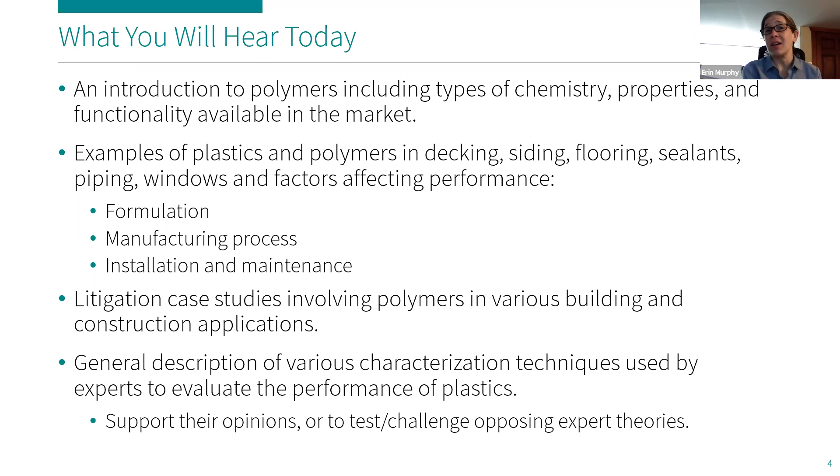So what are you going to hear today? We're hoping to tell you about what polymers are, give you a high-level Polymer 101 crash course. Once you understand the chemistry and properties of polymers, we'll tell you why they're useful in building and construction—applications in piping, windows, flooring—and factors affecting their performance, like formulation, installation, and manufacturing. Then some litigation case studies about how these polymers failed in these applications and why: is it formulation issues or installation? And the characterization techniques we use to form our opinions and evaluate the performance and failure mode of these materials.

But why do we care? We care because polymers are everywhere. If you look around, there are polymers in almost every application space and every industry, ranging from biomedical to aerospace, and of course construction—they're everywhere.

These polymers can come in many forms. You can get bulk polymers, like plastic piping to transport water. You can get composites, such as fiber reinforced epoxy. You can get films, like packaging materials. You can get paints and coatings that go on tanks. You can get adhesives and sealants that need barrier properties. All of these are polymers in some form or another.

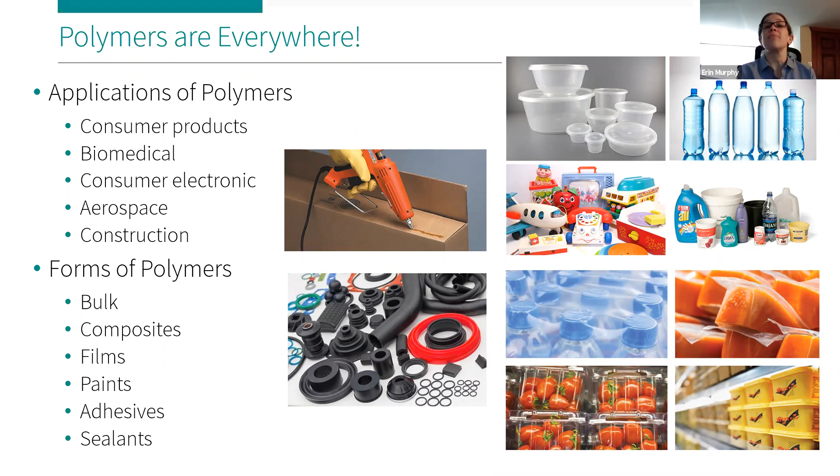In the grand scheme of things, products are always designed to work perfectly. We think about the end use conditions when we design the polymer and the formulation, how long it needs to last in the application. We validate it, test it, pull on it and push on it the way we think it'll be stressed. And we look at all the quality control we need in the manufacturing process to ensure we've met the performance spec.

But there's a lot of factors outside our control. Something goes wrong in manufacturing, or somebody value engineers a component out of the system. There's a lot of places in the supply chain where communication can break down. Somebody can install it wrong, or didn't consider an environmental factor when they spec'd that product in. So even though we designed everything to work perfectly, sometimes things can still fail.

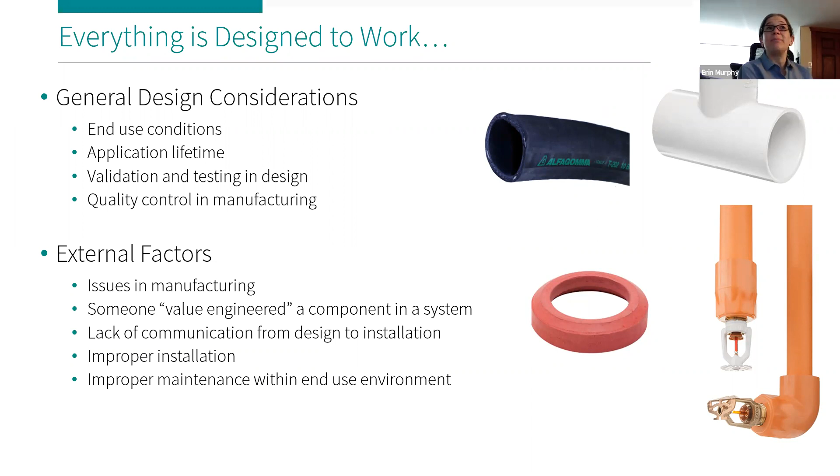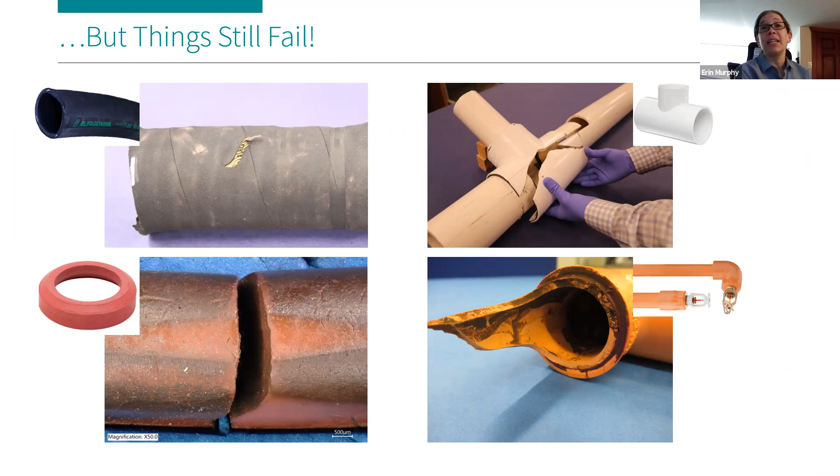And that's what we end up seeing. These products are designed perfectly, but something goes wrong, whether that's manufacturing, overloading the system, improper design, or some combination thereof. And that's where we get called in, and that's where we end up having a lot of fun.

So today we're going to split this talk up into a few sections. I'm going to start with that high level Polymer 101 - I promise not to make it too painful, there will not be a test - and tell you about the tools in our polymer chemistry toolbox that give you the properties and function you need in application. Then I'll hand it over to Mike, who'll tell you about common failure modes and case studies: plasticizer migration and environmental degradation in some sealant materials. Then Matt will finish us off with applications in concrete, flooring, and tile - application spaces where you just need a little bit of polymer, but if you mess that up it can have catastrophic effects.

So let's start out with Polymer 101.

So starting off with, what is a polymer? A polymer starts out with a monomer, which is just a single unit of something. When you link all of those monomers together, you build up what's called a polymer. Link one monomer with another, you get a dimer. Put 3 together, it's called a trimer, and you can keep building. If you have less than 10 units together, we call that an oligomer - just a small in-between material. But once you get past 10 repeat units, we call that a polymer, and that can go from around 10,000 molecular weight up to over 1 million molecular weight. So these can be very large molecules.

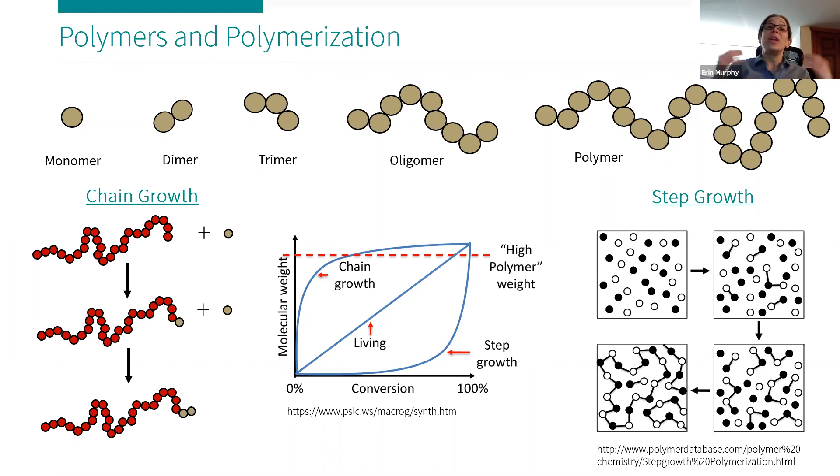Also, the type of chemistry is very important. There's a whole lot of different individual monomer building blocks we can choose to build our polymers out of - we've got a few up here on top. So ethylene is a monomer, tetrafluoroethylene is a monomer, and so on. By changing the chemistry of that monomer unit, we put different functionality into the polymer backbone. So as we polymerize ethylene monomer, we get polyethylene. From the tetrafluoroethylene monomer, we polymerize that to polytetrafluoroethylene, or PTFE, and so on. As we control the chemistry in the backbone, that imparts different functionality.

So for that fluorine group, that makes it very hydrophobic. It no longer will attract water, water will be repelled. And so that gives us the functionality that we apply to nonstick coatings or nonstick surfaces. Same for silicone. Silicone ends up being very high temperature, high chemical resistance. It's also very soft and flexible, so it ends up being used in a lot of biomedical applications. Lactic acid is unstable in water, so it can be degraded in the presence of water. By knowing the different chemistry and what it imparts, we can choose the different types of polymers and plastics for the application.

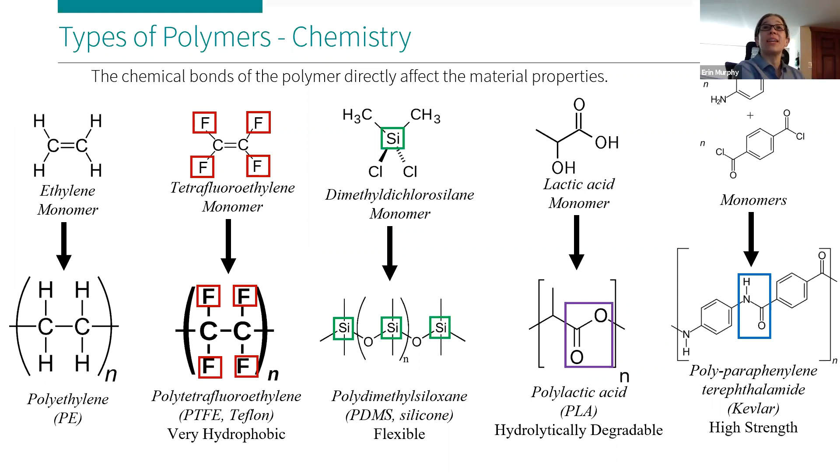There is a lot on this slide, but this is considered your cheat sheet to polymers. We break them up into multiple classes, so you can look at real world applications, like when you see your recycling logo on the bottom of your plastics and you get a number, 1, 2, 3, 4, 5. That breaks it up into these categories. You may see things like PET or PS or PC, those are abbreviations for what those polymers are.

So the different classes: we can have thermoplastic polymers. Those are typically recyclable, the ones that have the recycling logo, meaning you can melt them and reprocess them multiple times. Versus a thermoset, this is something where you have chemical crosslinks forming into a three-dimensional network. Those crosslinks can't be reversed, so it's a non-recyclable system, but that also tends to mean it's a very strong, stiff, high thermal stability material. So this is your epoxies and your phenolic resins.

You can also have rubbers or elastomers. These are your very stretchy, flexible materials, tending to be used in gaskets, sealants, things like that. And then you can have something with properties of both, which is a thermoplastic elastomer. It's temperature dependent, it can be plastic under certain conditions and elastomeric under certain conditions. As you can see, we can change the chemistry and get this huge wide property set, from plastics to rubber and somewhere in between.

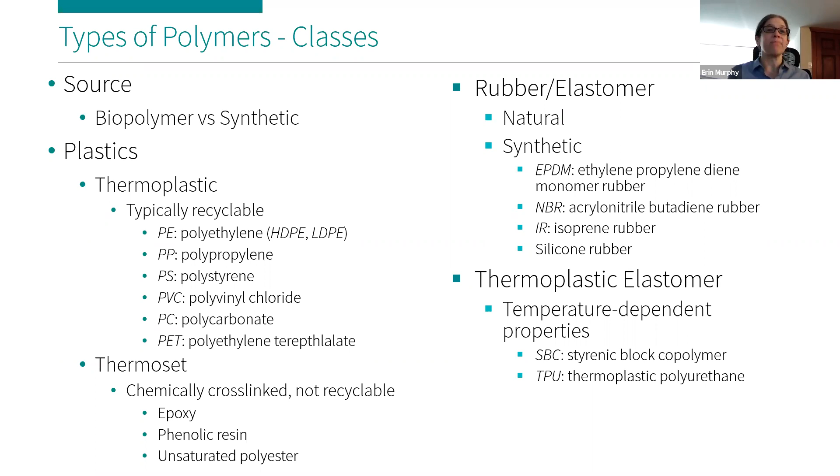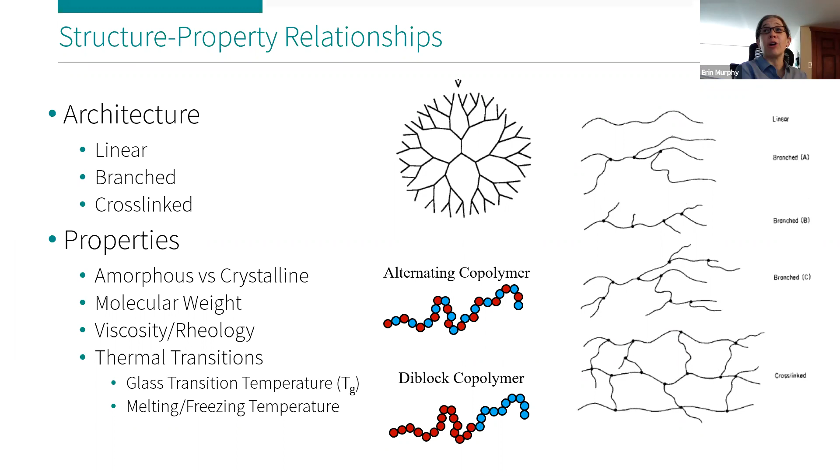Another way of getting that is by how we control those monomers. You can use multiple types of monomers, and if you put them in sequence, either alternating like we're showing here, red, blue, or in blocks, you'll get different performance properties. So by controlling how we place those monomers in sequence and the overall architecture, we can control properties.

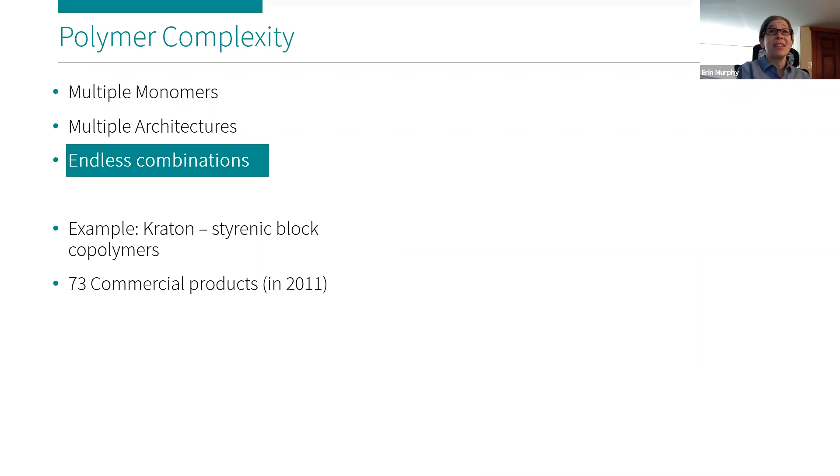So one good example, this is from my former company. You can have just a few monomers and a few different architectures, and you can get a lot of different combinations of polymers and commercial products. Kraton was my former company, we made styrenic block copolymers. In 2011, we had 73 commercial products. These all started from 3 monomer building blocks. So those are the 3 monomers.

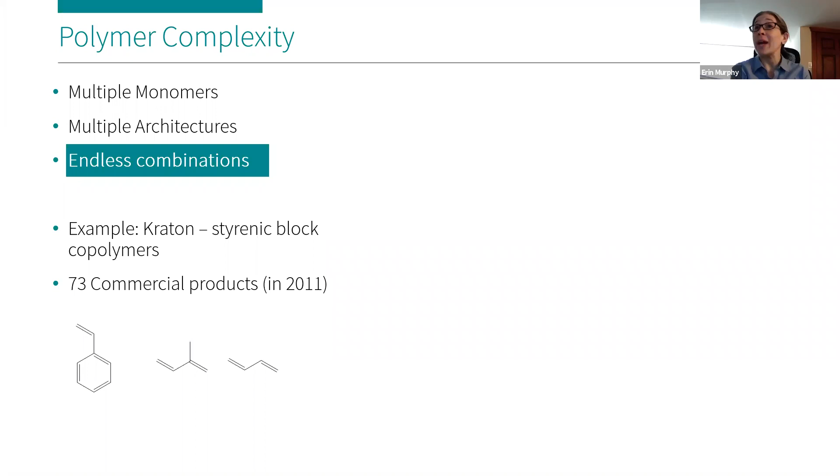Just 3 starting building blocks, but by changing the molecular weight, the architecture, the length of these building blocks, the ratios of styrene to rubber, the degree of branching, we could get all of these different products that all had different properties and all went into different applications. It was something really amazing to me as a polymer chemist: you just have a simple set of building blocks, but you could have an entire business in multiple business lines. These products went into things like repaving the Indy 500 racetrack to adhesives and baby diapers. So they go all over the place.

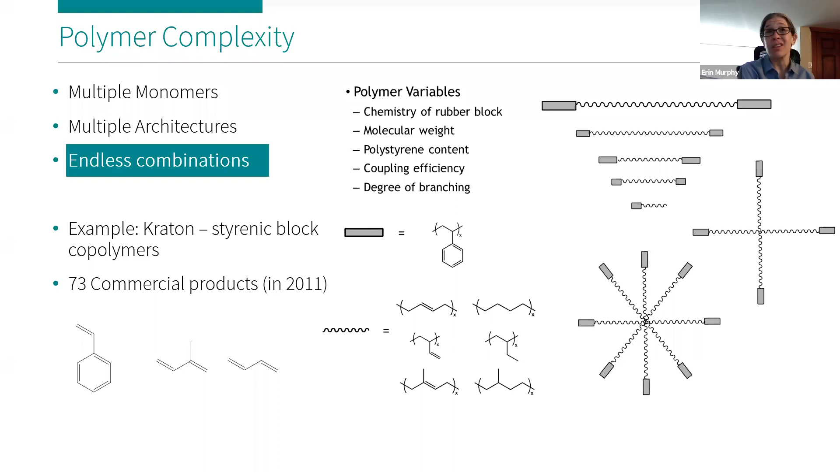So we can change structure to get properties, and these properties include things like the viscosity or rheology. How does it flow as a function of stress applied? How strong is it? Is it elastic and stretchy, or is it plastic and going to snap on you? And how well does it hold stress over time? Is it something that can undergo multiple cycles of stress, or when you apply stress and hold it, will it slowly creep over time? This is something we need to understand about our materials.

And so we can measure the properties, and different polymers, plastics versus rubbers for instance, will have different sets of properties and respond to stress differently.

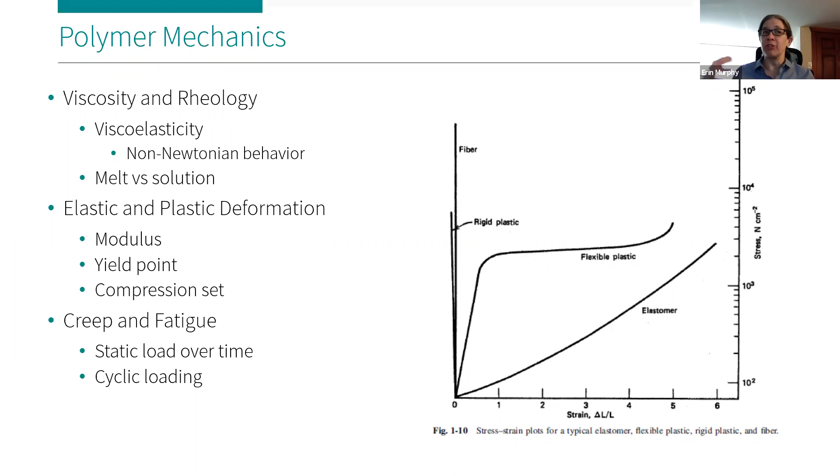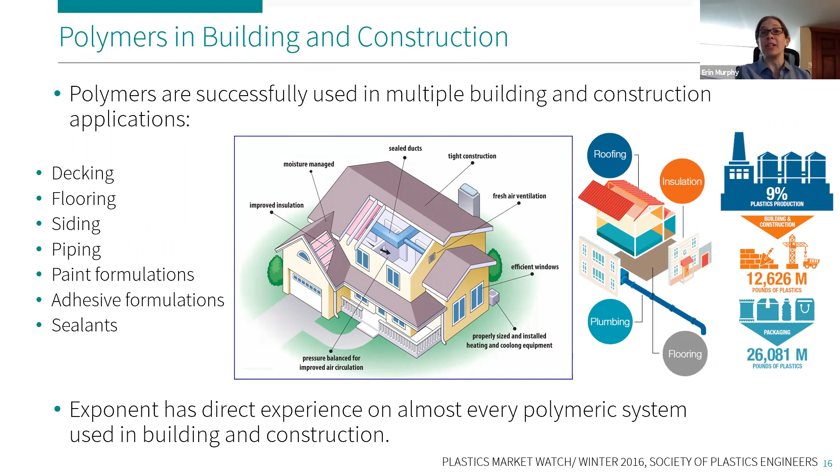The motivation behind bringing in polymers is that they are often cheaper, lightweight, easier to install, and you can get a lot of different surface finishes on these by just molding them in, so they can be aesthetically pleasing.

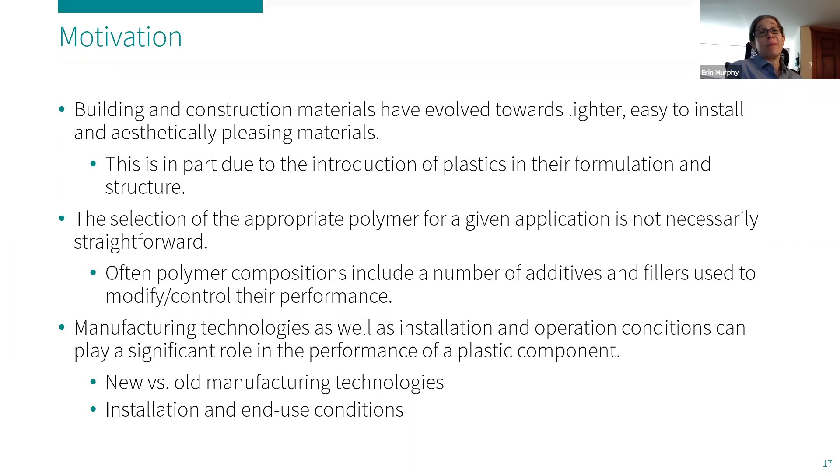The selection of these is not necessarily straightforward though, because a lot of times they have different compatibility issues with what they might be exposed to in their environment that you wouldn't think about with more traditional construction materials. There's additives and fillers that could migrate from one material to another. Manufacturing also plays a big role in the performance of these - you may have old technology that switched over and it could change the properties. And installation, as we've mentioned, has a big role to play in the performance long term.

But what we do when we look at these, we need to first understand what the environment looked like, and inspect the evidence to see was it a manufacturing defect, or do we think it was installed improperly, or was there some end use condition that may have impacted that failure. So we look for manufacturing defects - is there something obvious? Was it along a weld line that it failed? Was there a big void? Was there a fisheye, which is an unmelted polymer particle? Is there something in there that initiated the stress and the failure?

If not, is there something obvious from installation, or is there an environmental stress? Is there an impact mark? Is there signs of chemical contamination? Is there something else that might have impacted that failure? A lot of times that's what we see, that it could be combinations of the two. We could see an impact event along with some chemical stressors, and that's how we will chase that failure.

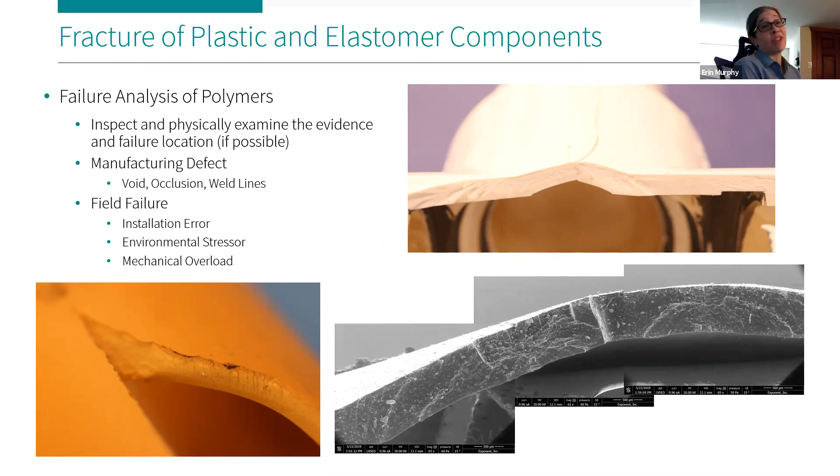I think that's it for my high level polymer chemistry. Hopefully you guys have a good foundation of the different classes of polymers, the different types of chemistry involved, and I will hand it over to Mike.

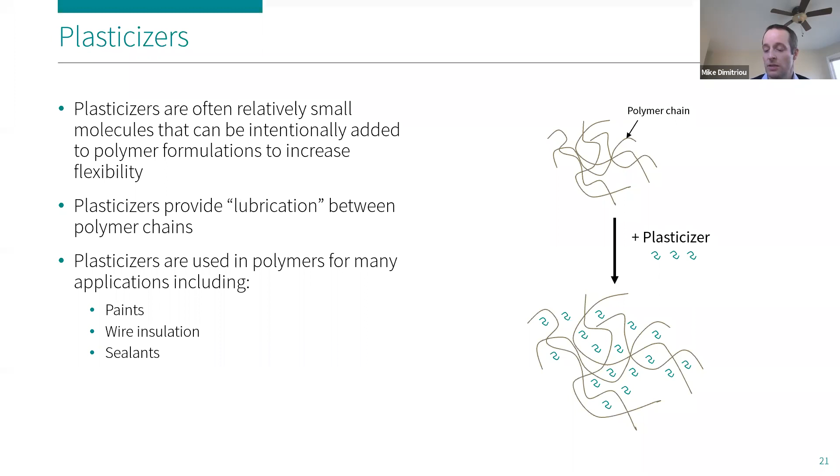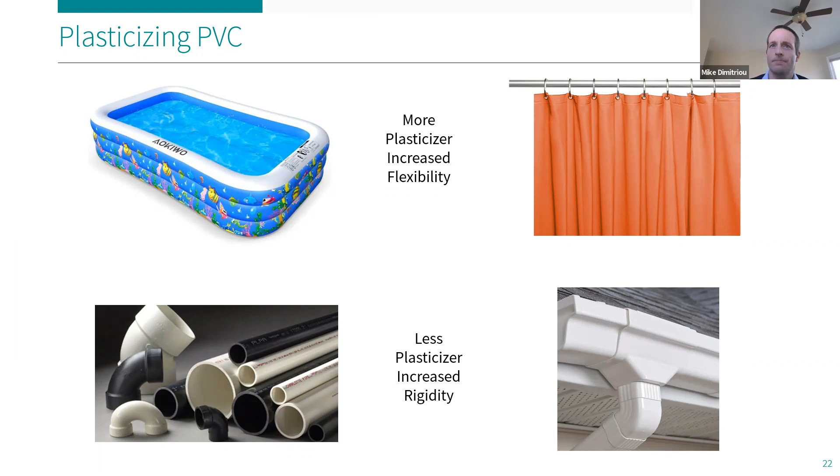Back to plasticizer migration. As a formulator engineer, when you put a plasticizer in a polymer, you want it to stay in place and keep the material as flexible as it was the day it came off the production line. Unfortunately, that is not always the case.

Plasticizers can migrate when a material containing plasticizer is in contact with a neighboring polymer. In the depiction, the polymer on the left is formulated with some plasticizer, and when placed near a neighboring polymer, over time some of that plasticizer migrates into it. Unfortunately, this has a double negative effect—you get a change in properties of the host polymer losing plasticizer, and a change in properties of the neighboring polymer gaining it.

The host polymer, by losing plasticizer, may demonstrate a loss of flexibility and/or loss of adhesion, while the neighboring polymer, originally made to not be flexible, may experience a reduction in viscosity, become susceptible to environmental stress cracking, and become more flexible than originally intended.

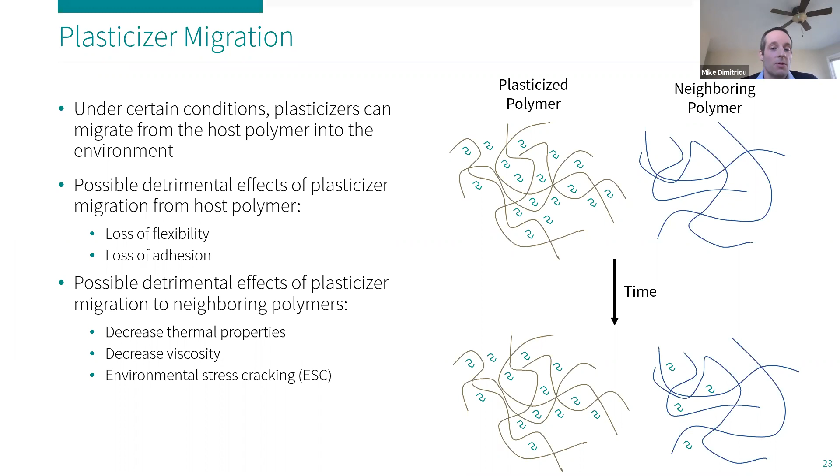A more tangible example of this is drying mud. Mud is dirt mixed with water, where water represents your plasticizer. Over time, as water evaporates, that's analogous to losing plasticizer from your material, and you end up going from a flexible, sticky material with better adhesion to something brittle and less flexible.

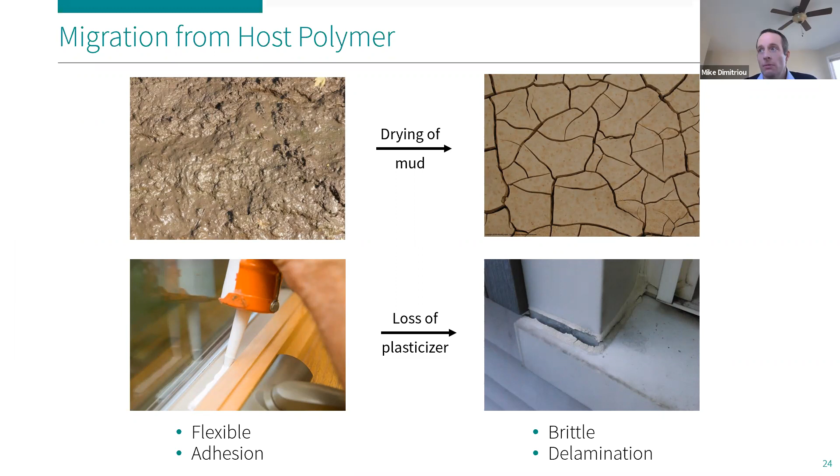A more practical construction example is caulking or sealants. In the bottom left image, caulking is applied to a window joint—it's flowable, but once dry it needs to demonstrate flexibility and adhere to substrates. However, if plasticizer leaves the sealant over time, it can embrittle, possibly delaminate, and no longer serve its function of filling and sealing that gap.

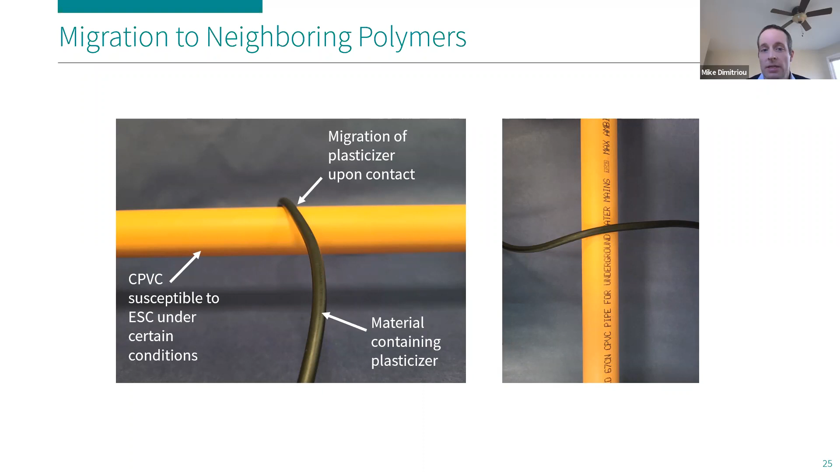It turns out CPVC is susceptible to a form of cracking referred to as environmental stress cracking. This cracking requires two components or actions to cause the material to crack. One is stress - it needs to be under some form of pressure from the water source or bending from some other external push-pull mechanism. It also needs to be exposed to some type of solvent, which could be a plasticizer. So under certain conditions, this is a scenario where you may end up with plasticizer going into the CPVC and initiating environmental stress cracking.

This has initiated a crack due to environmental stress cracking. This crack has propagated all the way through to the inner diameter, which is undesirable for any pipe application. With sufficient pressure or time, this crack may expand and may eventually lead to a rupture of this pipe.

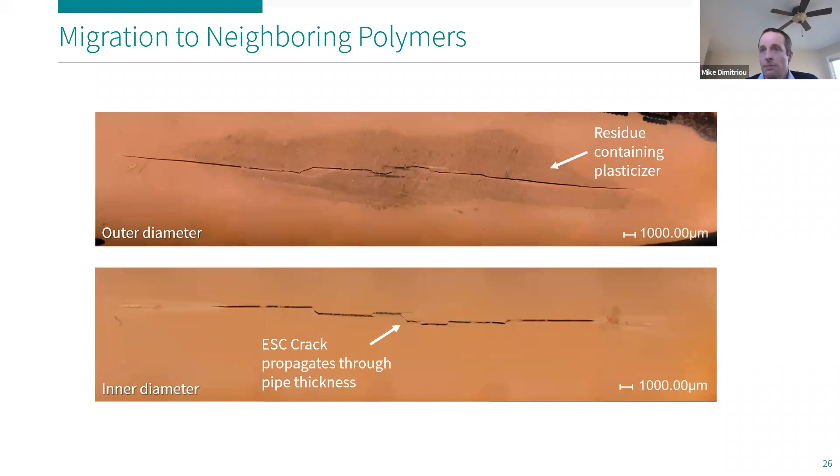So that was one mechanism we commonly see at Exponent that is initiated by some form of migrating species or plasticizer migration. The other mechanism I wanted to go through is environmental degradation - the degradation of polymers due to exposure to environmental factors that you would expect in construction applications.

These might be thermal fluctuations, humidity exposure, fluctuating stresses due to the application, or exposure to sunlight or ultraviolet radiation. Those are typically the more common environmental stressors, but there can be others. For example, if you're next to the ocean, salt exposure from the ocean may be a possible stressor.

To highlight this, I was going to take the example of IGUs, or insulating glass units. In their simplest form, IGUs are two panes of glass separated by an interstitial space. They can be used in residential as well as construction or commercial building applications. To achieve the interstitial space, essentially what you do is put a spacer bar around the outer perimeter, which holds your two panes of glass apart.

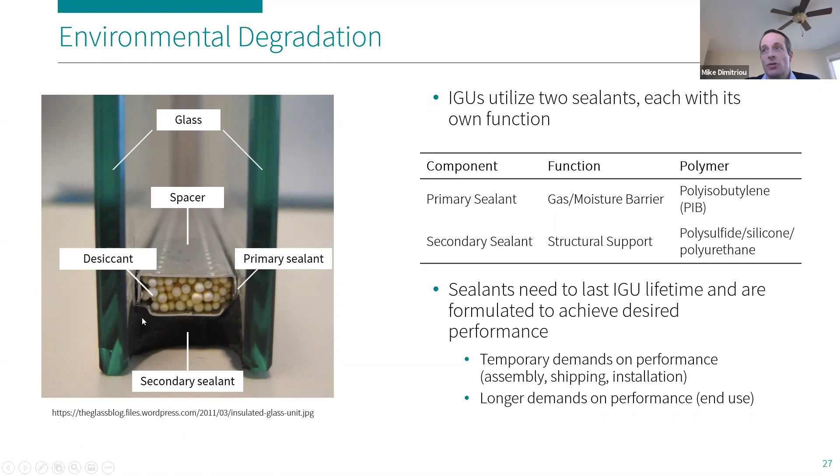Here's another example of what this might look like from a cross section. You can see this is the edge of an IGU, where this black section or black layer here is your secondary sealant, locking everything in place. But because it doesn't necessarily have the best barrier properties, you add a second sealant right next to it that is able to sustain any sort of blockage and not allow anything to pass in and out of the window, keeping it dry and clean.

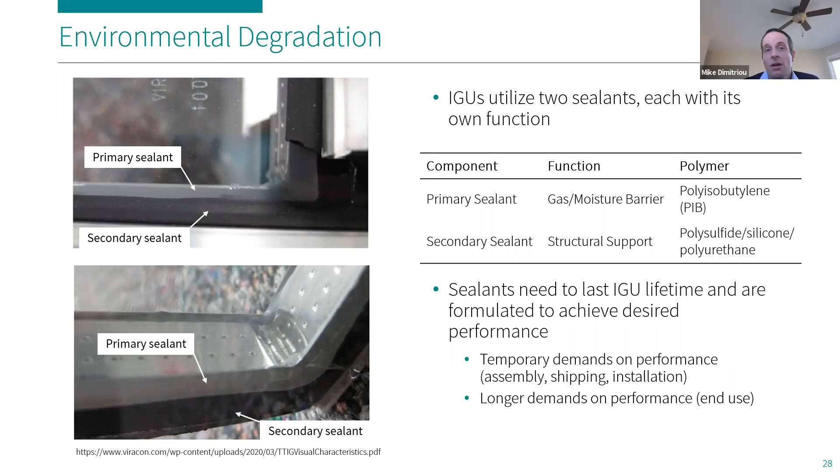You obviously need these materials to be adhesive and demonstrate some sort of tack. You want them to stay stuck between the spacer bars and the glass surfaces. If things unstick, they will generate avenues or pathways for gas or moisture to pass through.

Like Erin had mentioned earlier in this talk, your materials need some level of elasticity and strength to work under the operating conditions you need them to operate under. I'd already mentioned how barrier properties are necessary so that moisture can't get into that interstitial space. You need them to remain stable to operate sufficiently throughout the function of their lifetime.

In a lot of these situations, if they're going on high rises and you're looking for a very pretty curtain wall, you need the sealants to aesthetically fit into the broader construct.

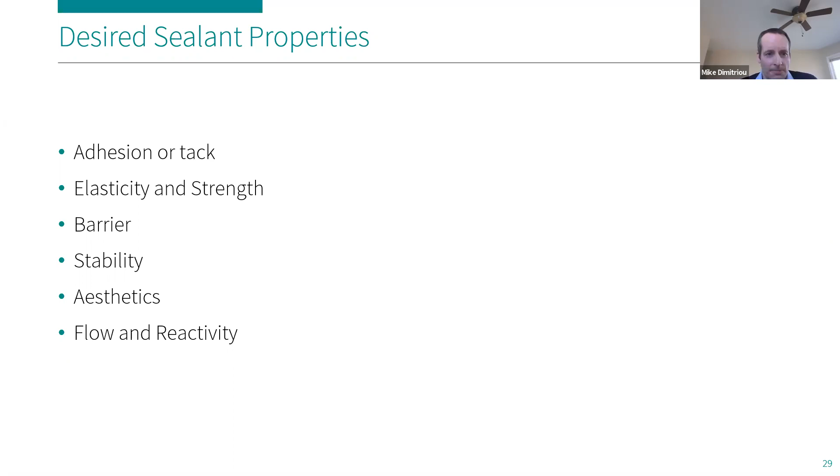What I should highlight here is that environmental degradation may, and probably will, have a different impact on all these properties. Depending on how these properties manifest or change throughout the lifetime of an IGU, it may result in an eventual different failure. To highlight that, I'll go through two examples.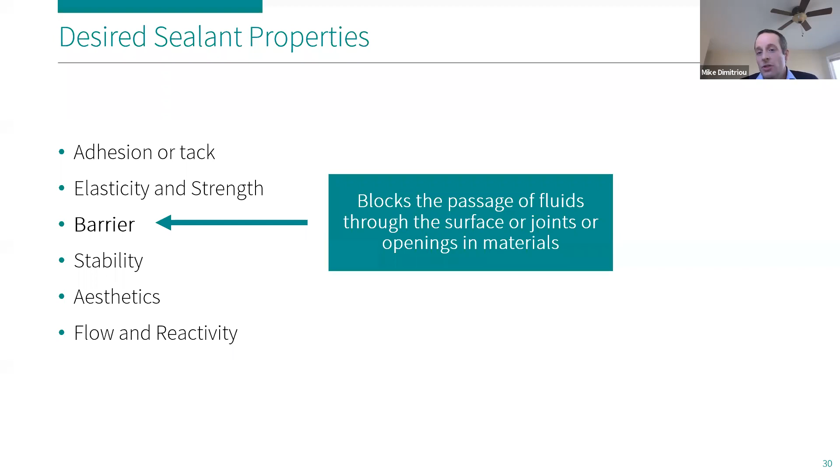If we're to refer to barrier, like I said earlier, what do you need a barrier to do? You need it to block the passage of fluids through the surface or joints or openings in a material. If the material degrades such that you no longer get those barrier properties, you would end up in a situation depicted by the photos here. You may get fogging on the inside of the window or condensation of moisture. Unfortunately, the reality in these situations is you can't clean it. You need to replace these IGUs because you are not able to access those inner surfaces.

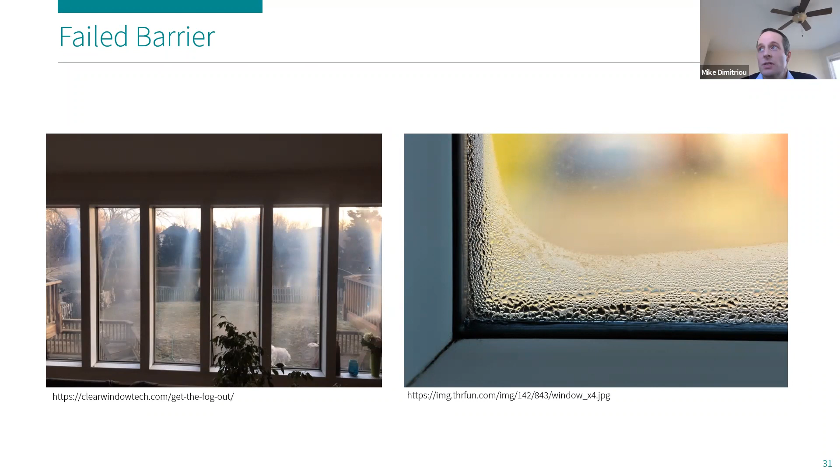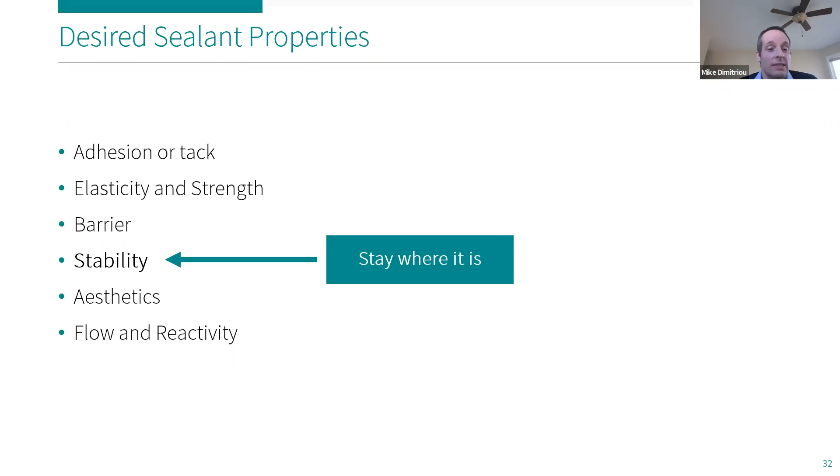And this, for one, is not aesthetically pleasing. And for two, it may end up in a situation where you compromise that barrier and in fact allow some form of moisture or air to get into that interstitial space.

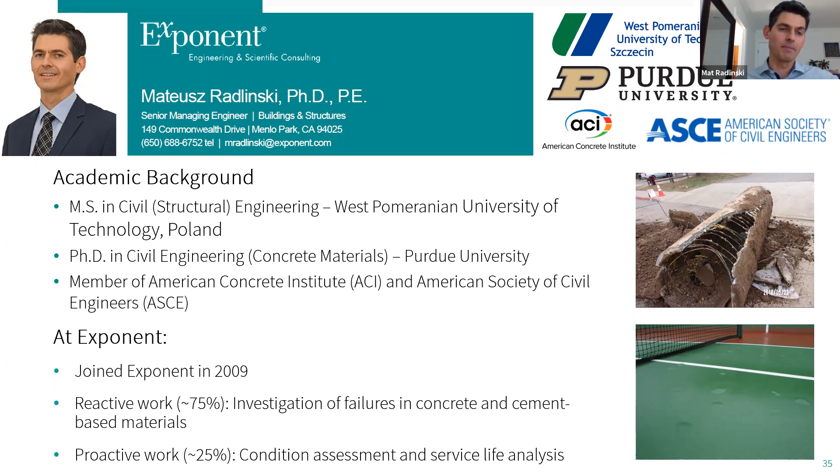So you may still be wondering, why is a concrete guy going to be talking to you about plastics and polymers? Erin already answered that question, basically because polymers are used everywhere, as you'll see here in a moment. We put polymers in the concrete mixture, we embed them in concrete, we apply them to the concrete surface, and then put them under the concrete, and the same goes for flooring and tile applications.

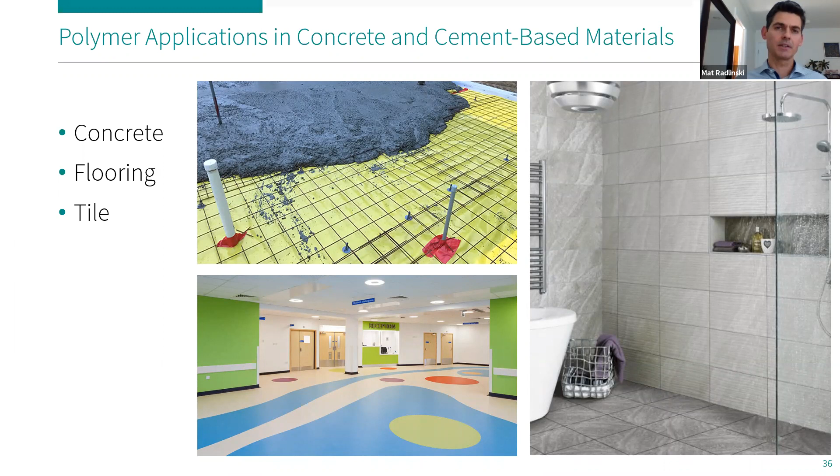Just jumping right into the polymer applications in concrete materials, and specifically chemical admixtures. Concrete today is not the semi-random mixture of some rocks, sand, cement, and water it used to be 50 or 100 years ago. It's a far more sophisticated and generally highly engineered material that's customized for a given application. In the vast majority of cases, any concrete truck leaving a ready-mix concrete plant in this country, heading over to a commercial construction site, will incorporate one, if not multiple, chemical admixtures.

As you could guess, the vast majority of these chemical admixtures are polymers, either in liquid form or powders. Each one controls or enhances a totally different property of concrete, either in its fresh state or hardened state. We have air entraining admixtures that introduce microscopic size air bubbles that help improve resistance of the concrete to freezing and thawing.

We have water reducing or plasticizing admixtures that allow for improved workability of concrete during placement. We have set retarding admixtures commonly used in hot weather applications, set accelerating admixtures for cold weather placements, and a variety of specialty admixtures such as corrosion inhibitors, shrinkage reducing admixtures, and viscosity modifying agents commonly used in self-consolidating concrete.

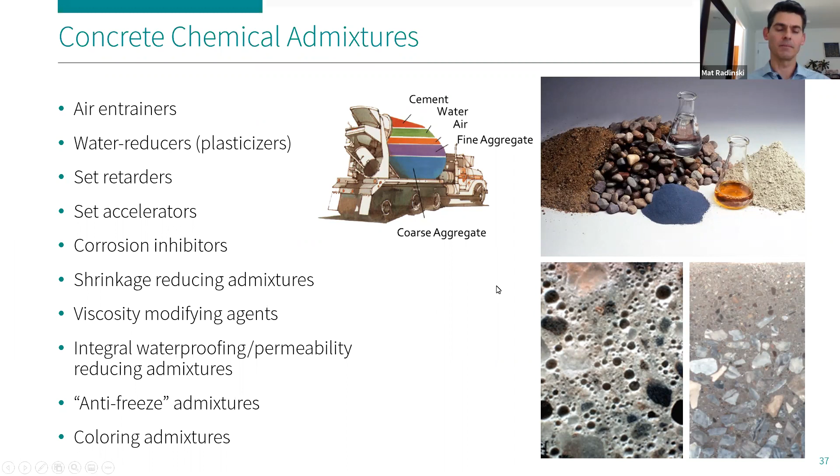These days, we can even make completely waterproof concrete, which obviously by nature is rather porous and permeable, thanks to integral waterproofing admixtures. There are also anti-freeze admixtures and a variety of coloring admixtures used in decorative concrete applications.

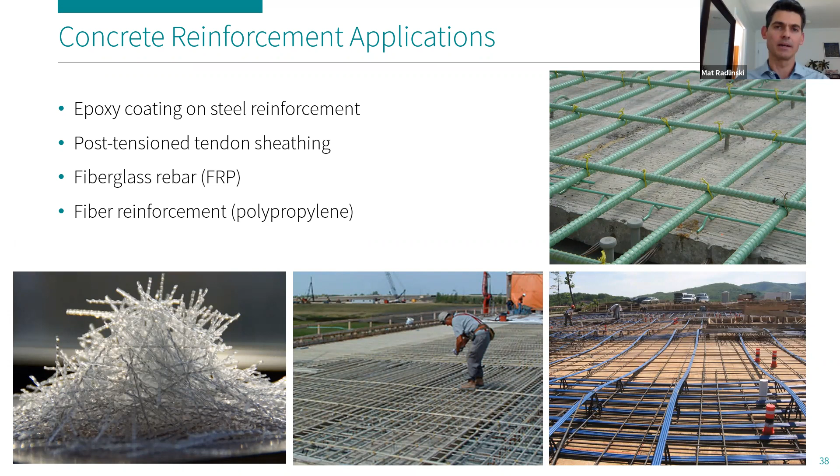Lastly, fiber reinforcement, the most common type including polypropylene fibers, generally used as a secondary type of reinforcement in concrete to improve ductility and resistance to cracking, but sometimes used solely as the only reinforcement in shotcrete or gunite applications.

We have a whole host of polymer-based concrete curing products, anything from polyethylene sheeting used to retain moisture in freshly placed concrete and minimize drying during the curing period, to liquid applied or spray applied white pigmented curing compounds, extremely common in concrete flatwork, slabs on grade, and pavements.

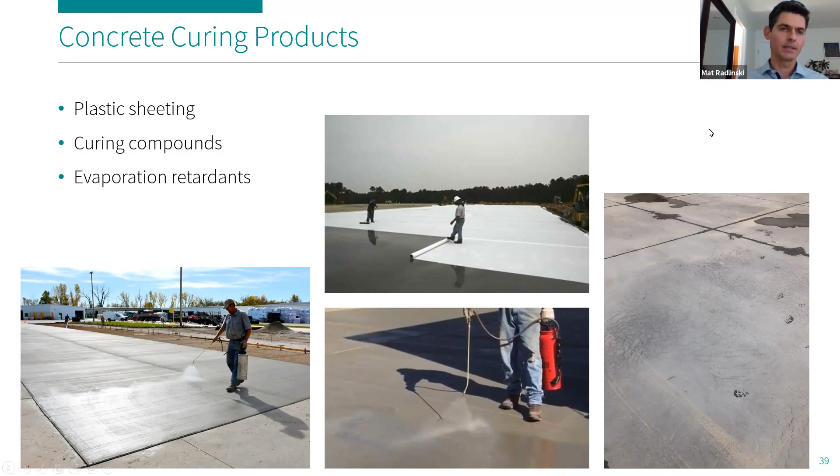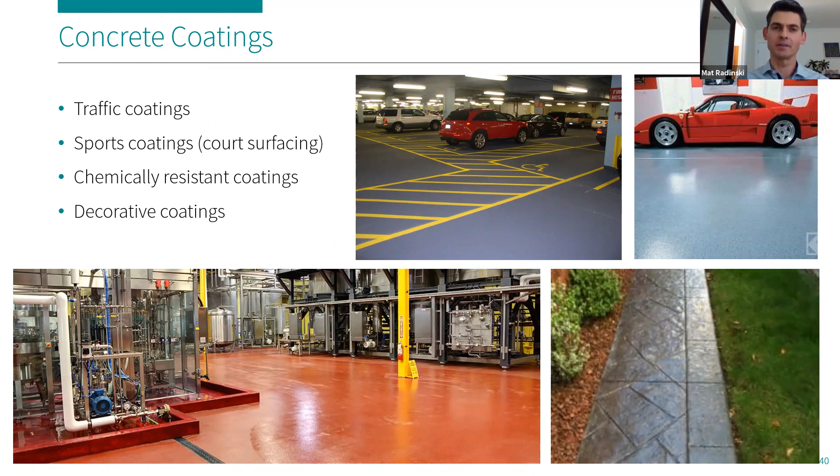Then we have a group of a variety of coatings commonly installed on concrete surfaces: traffic coatings in parking garages, things like epoxy and urethane coatings in plaza decks, sports coatings for basketball and tennis courts, chemically resistant coatings in food and beverage facilities, and of course decorative coatings in showrooms and miscellaneous residential and commercial decorative applications.

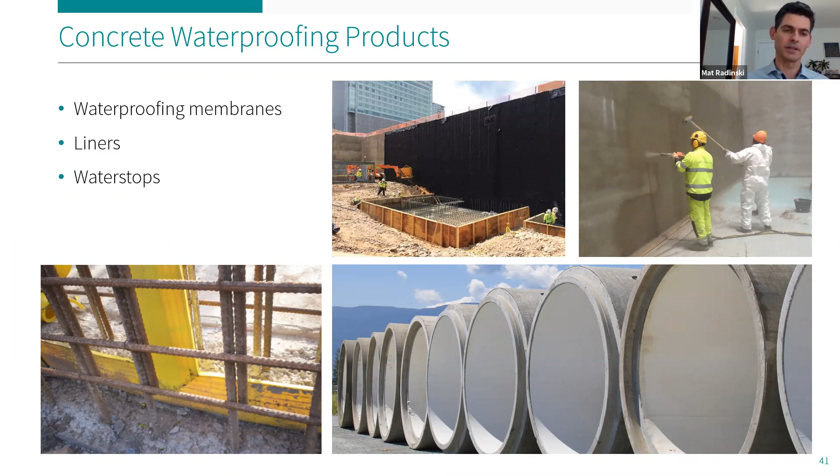Mike has sort of provided an example of environmental degradation of polymers in a window sealant example. I wanted to provide a somewhat comparable example, but in a concrete application, where we're looking at apparent degradation of a concrete waterproofing membrane. In this particular case, it's a blindside waterproofing membrane, installed on concrete shoring prior to placement of the concrete, which in this case is roughly a 2 foot thick concrete wall in a below grade multi-story parking garage underneath a high-rise building.

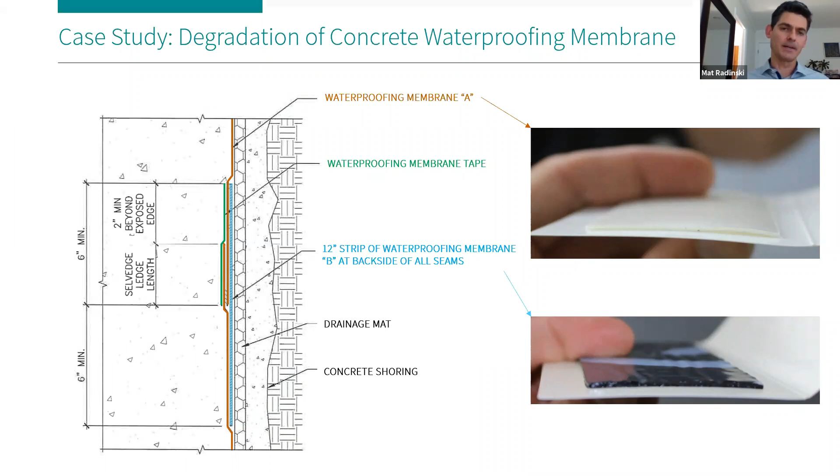As we've discovered in the course of our investigation, which involved sampling of the water at these water intrusion locations, chemical analysis of those samples, and comparison to the results of chemical analysis of the waterproofing membrane, both sampled from the building and in its unused condition.

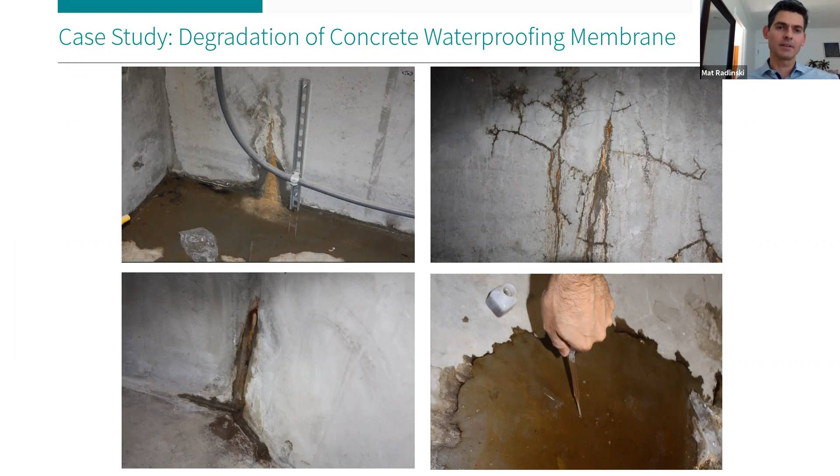We determined that there was clear evidence of chemical degradation of the waterproofing membrane products, likely associated with certain chemicals present in the groundwater in that particular area. We observed clear evidence of many chemical compounds leaching out of the waterproofing membrane into the water that flows through the wall. Of course, we were never able to conclusively determine if that was the sole cause of the water intrusion, and whether there were any other issues related to the installation and lapping at seams. But certainly it was very clear evidence that despite the fairly recent installation, there has been a fair amount of degradation.

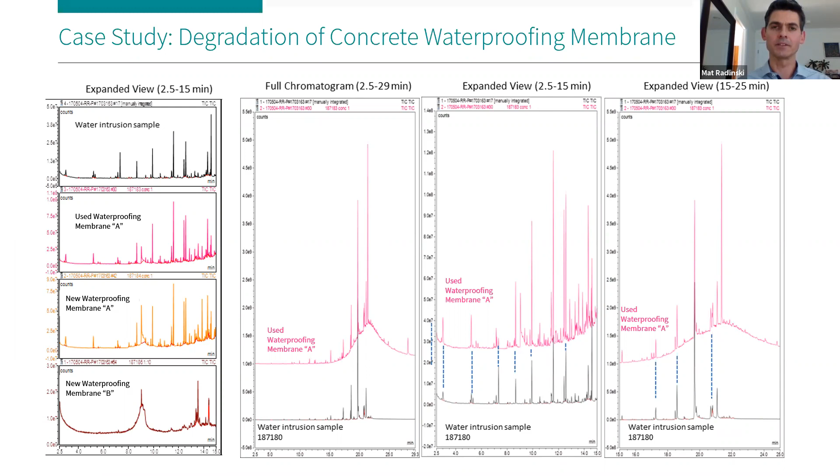Moving on to a family of concrete repair products. These days, short of replacing concrete with new concrete, or at least some sort of cement-based grout, I would say the majority, if not all, concrete repair products are polymers.

Things like coatings that I've already covered, and sealers, a variety of crack repair products, ranging from extremely low viscosity methacrylate sealants that are spread on the surface of concrete flatwork, particularly bridge decks and pavements, to seal hairline cracks, polyurethane flexible sealants used to seal joints in rout-and-seal type repair, epoxy injection used to seal cracks and to structurally bond and restore structural capacity of the concrete, as well as urethane grout used to seal leaking cracks. There are also instances of use of polyurethane foam that expands roughly 7 times and does a great job of lifting, settling slabs and filling voids below slabs on grade.

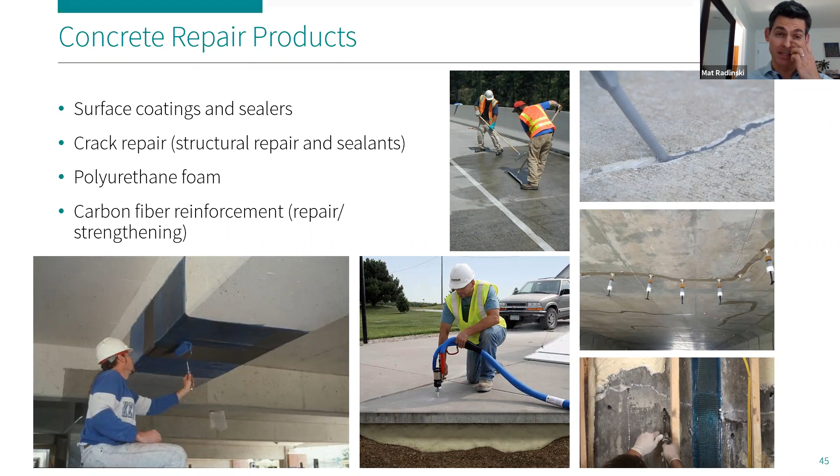And polymers such as epoxy resins are also commonly used to bond carbon fiber reinforcement in repair and strengthening applications.

Now shifting gears into examples of polymer applications in the flooring industry. I probably don't have to tell you how common polymer-based flooring is in commercial applications, including schools, medical facilities, offices, etc. Products such as sheet vinyl, vinyl composition tile, luxury vinyl tile, more recently extremely popular in residential applications as well, and rubber flooring, carpets, etc.

As you could guess, all these products are also typically bonded to concrete with a polymeric adhesive, typically an acrylic-based or an epoxy-based adhesive. We put moisture vapor retarders, commonly referred to as visqueen, underneath concrete slabs on grade to minimize the risk of moisture vapor transmission through the slabs and moisture damage to moisture-sensitive floorings.

And more commonly, particularly in fast-track, high-profile construction, there's been an increased use of moisture mitigation systems, which are essentially 100% solids epoxy coatings put on brand new concrete to essentially eliminate the risk of future moisture damage to moisture-sensitive floorings.

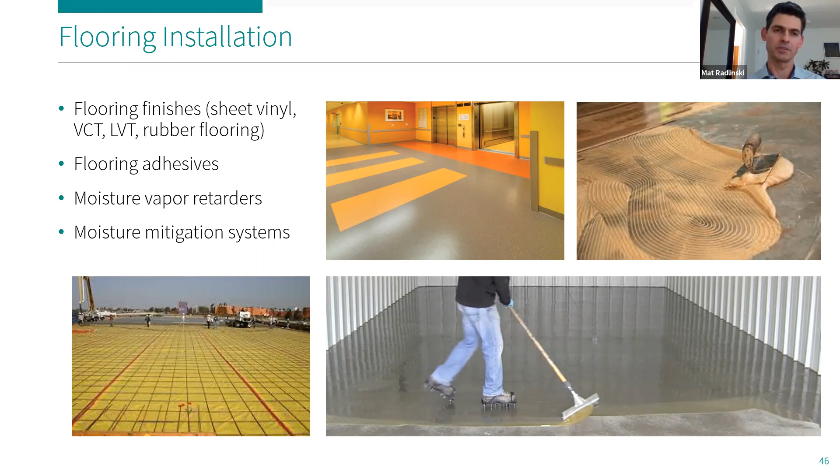Next slide. I have a nice example tying several of these products and concepts together in a recent case study I've worked on. This particular one involves a fairly old, 35-year-old building—actually multiple buildings that had the same problem—which recently underwent some pretty severe remodeling and tenant improvements under new ownership. These are single-story commercial buildings, all of which exhibited localized yet widespread failures.

Upon removal of the flooring, we determined extremely high moisture content in the underlying concrete slab, and evidence of re-emulsification of the adhesive around the perimeter of the tile, as well as evidence of mineral deposits accumulating on the concrete surface.

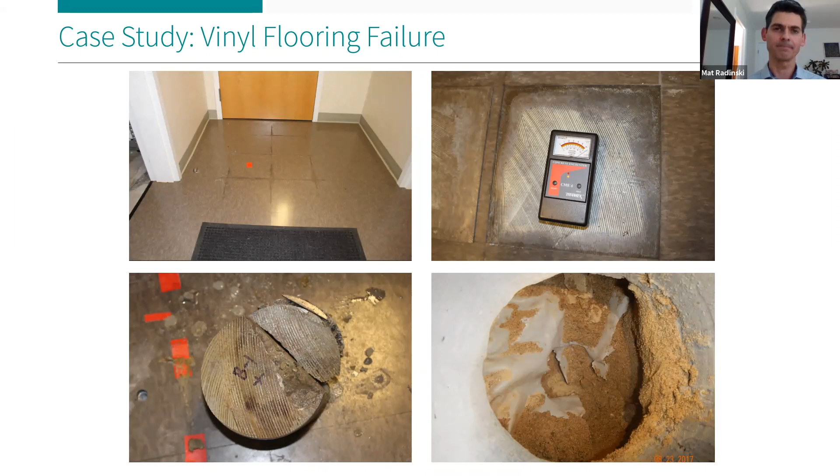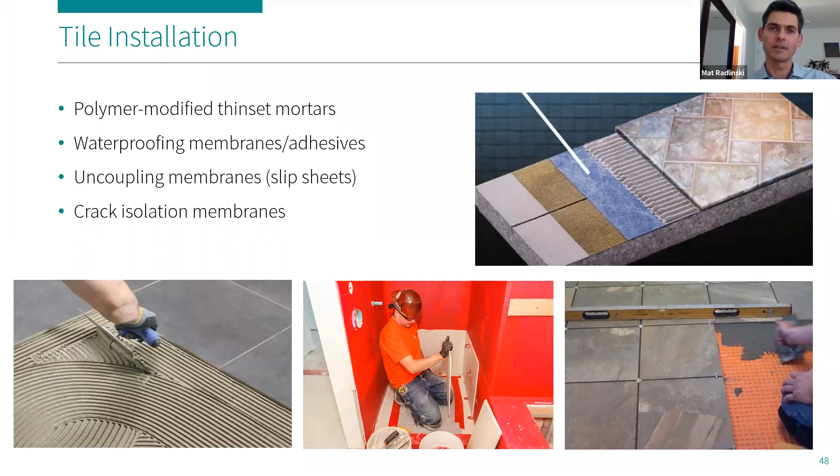What we discovered is that the relatively thick layer of the tile thin-set mortar, a cementitious product, resulted in this bowing or curvature, and it was such a high level of stress that the underlying waterproofing membrane adhesive was unable to restrain or accommodate.

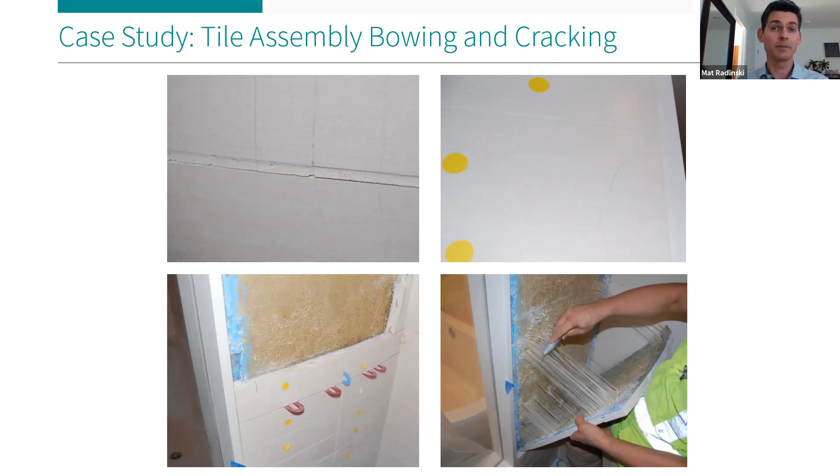In this case, there was no cracking in the tile - that's the good news. But the individual tiles were warping in kind of the opposite direction to what I described in the example before. So the edges of individual tiles were lifted as opposed to the centers. The centers, in this case, remained bonded to the substrate; the edges were not, and it created a fairly unsightly appearance, especially given the location and the fact that it was a brand new remodel project.

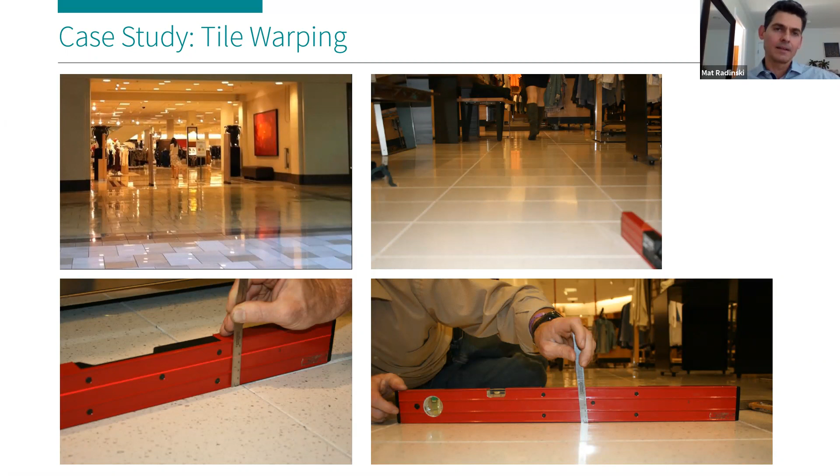The failure mechanism is really a perfect storm of three different things happening. We had a thin-set mortar that, for whatever reason, required a fairly high amount of water to be added during mixing. That water from mixing was apparently capable of saturating fairly high absorption tile installed on top of it, which allowed for warpage of the tile. And because the underlying crack isolation membrane underneath the thin-set mortar was a peel and stick product that didn't have, as you could probably guess, a very strong adhesion to the substrate, that allowed for debonding of the membrane along the edges.

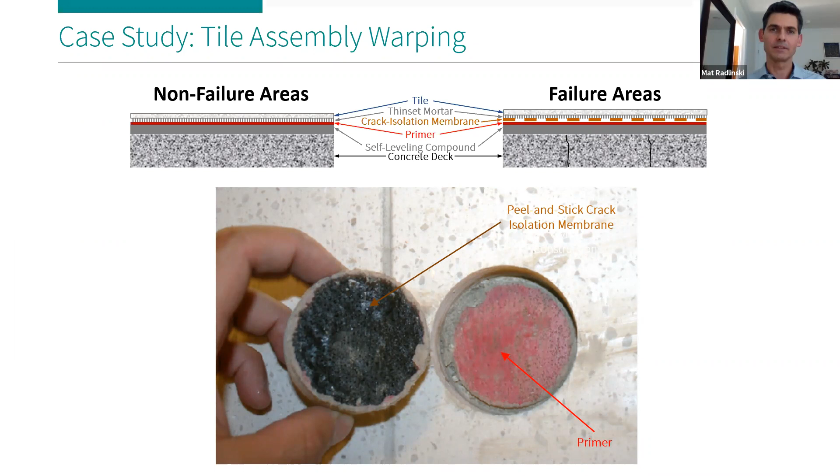Okay, well, I'd like to transfer over back to Erin. Erin, I think you're on mute. Did we lose Erin? Erin, can you hear us? Erin, I think we lost you for a brief moment, sorry, we didn't hear most of that.